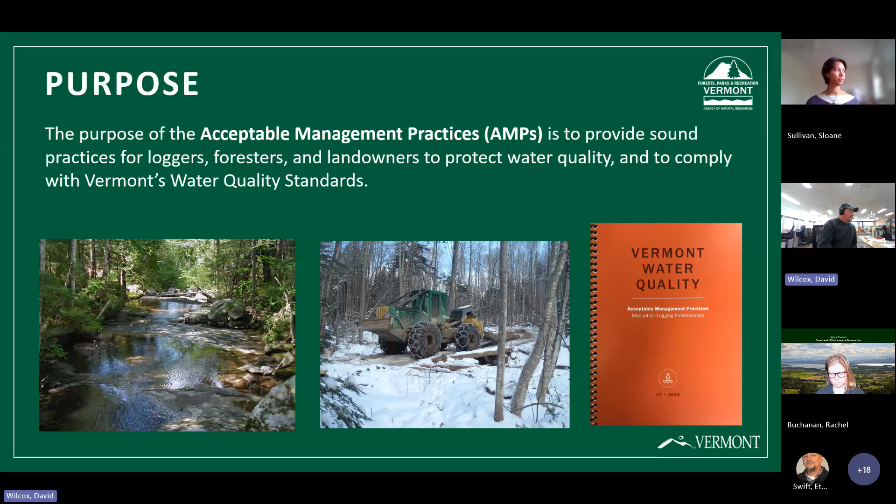AMP stands for Acceptable Management Practices. Hopefully they're not a new topic for folks, but they are to provide sound practices for loggers, foresters, and landowners to protect water quality and comply with Vermont's water quality standards. And to get started on the AMPs and what they are.

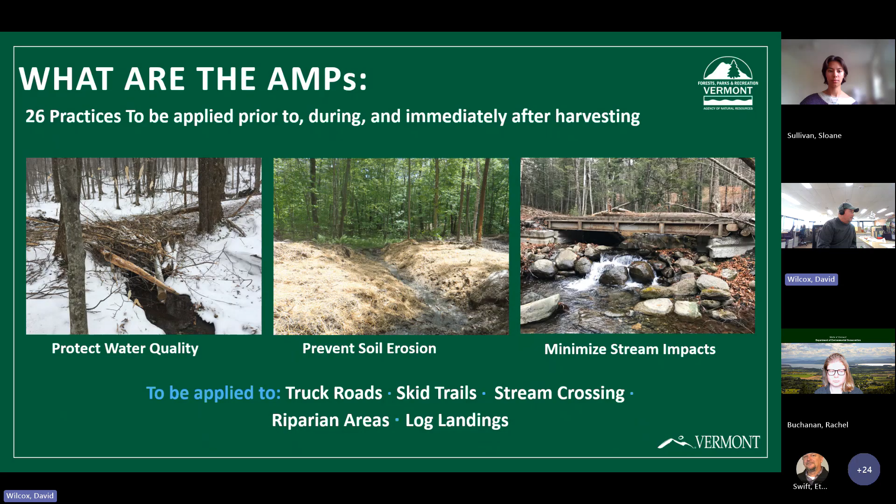Now I have a brief video I'd like to show, which is talking about the clean water commitment and the forest land practices, and hopefully it will go.

Nope. Sloane, any advice? Why won't that go? If it's helpful, you can either share your screen and open YouTube, or Rachel just sent the link and we can watch it asynchronously right now. So whichever you prefer, we can try those options. I think I will open it and we can look at it from there. Okay, great. Sorry about this. No worries. I swear it worked when... okay, there it is.

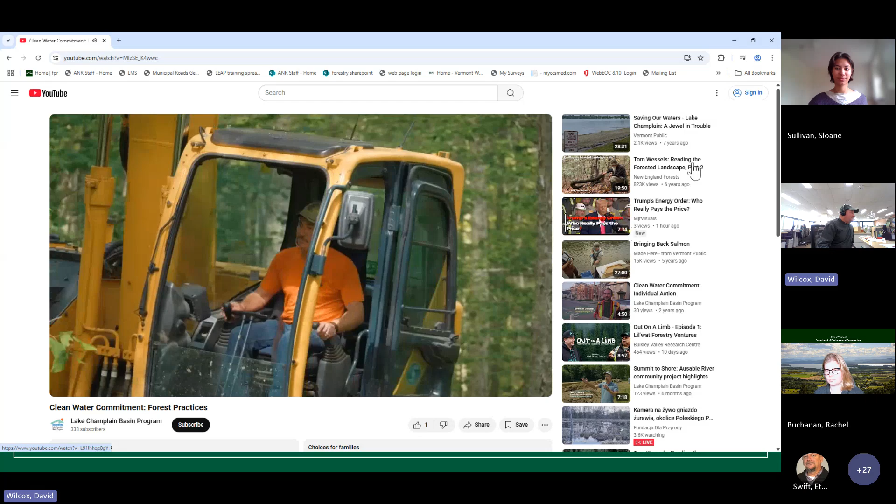Thumbs up. Great. I've been logging full time since 1987. Before that, I worked with my dad for a while, probably since I was like 9. Some guys get in it and they're in it for 3 years and they're done. They're on to doing something else, but I'm in this for a lifetime.

Roughly 73% of the Lake Champlain Basin's land area is forested. Much of this land is far from Lake Champlain and the human impact is relatively minor. But forests in Vermont contribute 15% of the phosphorus delivered to Lake Champlain. Broader use of management practices on private and state forest lands are helping to achieve the goals of the Lake Champlain Phosphorus TMDL. This area is within the Nebraska Valley Miller Brook watershed.

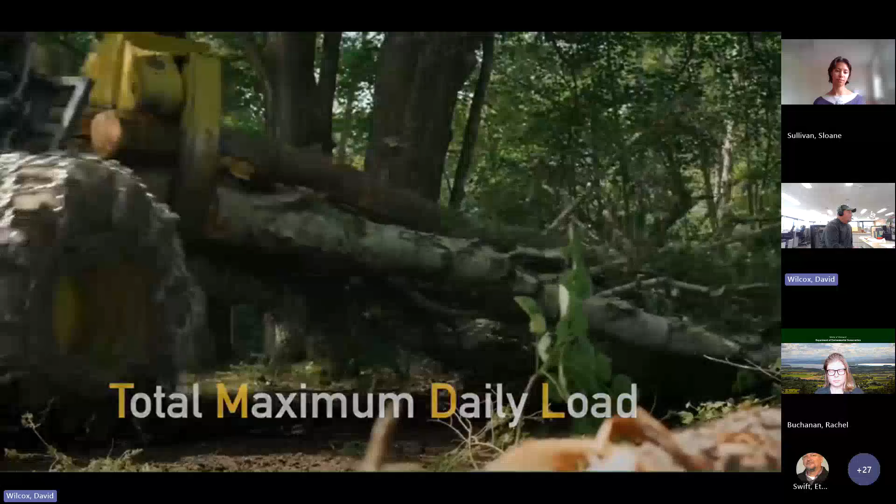It's a multi-use forest. It has lots of recreation, state parks, ski areas, hiking trails, but it's also a working forest where we harvest timber, firewood, all of the range of forest products that we get from our northern forests. We create trails, we create roads, we have stream crossings, and we need to do a good job of protecting the water quality in those areas. When we don't stabilize our trails and remove our crossings, that sediment can travel into headwater streams and eventually make its way to Lake Champlain. And that soil carries the phosphorus, which is the issue, and we want to prevent that.

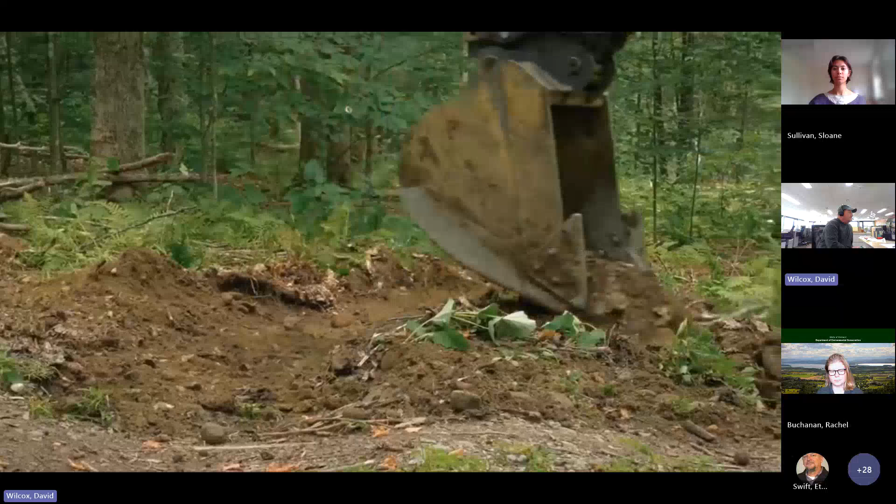Water bars are put in to control the erosion, like when it rains, like right now. And if you put them in correctly, there's less erosion. This is what we call closeout. It's the part of the sale after the harvesting is done.

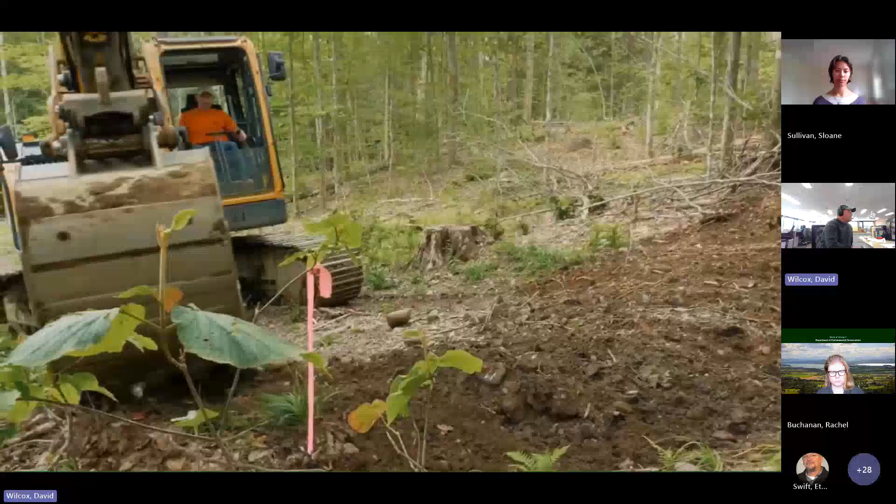So this flag tells the excavator operator that we need a water bar right here, which will divert the water that's coming down the trail, off the trail, into undisturbed soil, so it will soak in and it won't have enough speed or velocity to have any erosion.

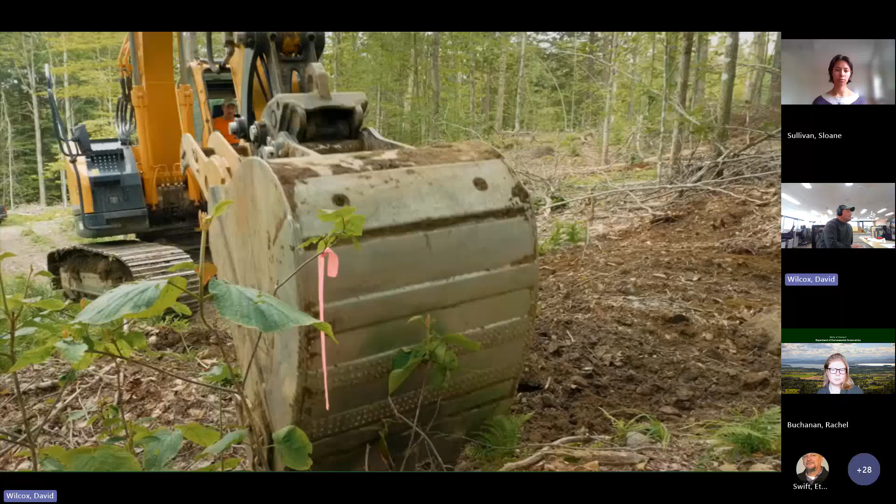Regulations that the state has on water quality have changed the law. They make sense. Regulations make sense. They rewrote the handbook for the water quality, the AMP handbook. The AMPs were Vermont's answer to the federal government for how the state was going to maintain water quality on logging jobs.

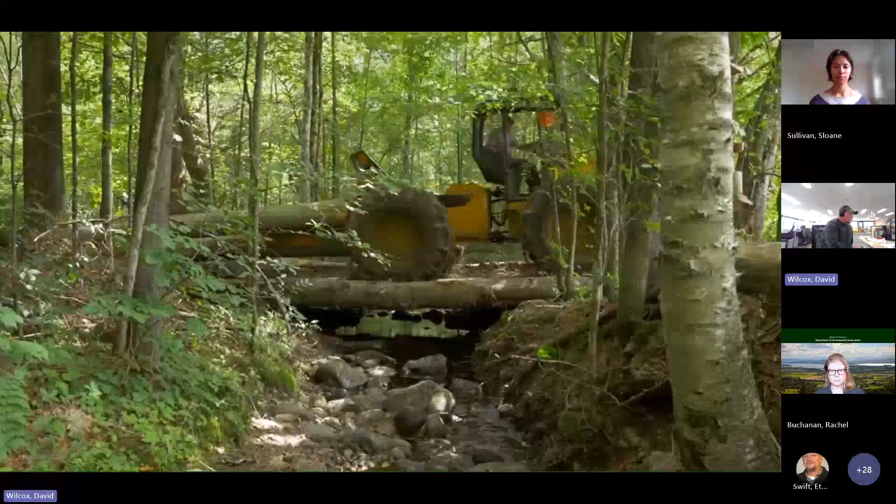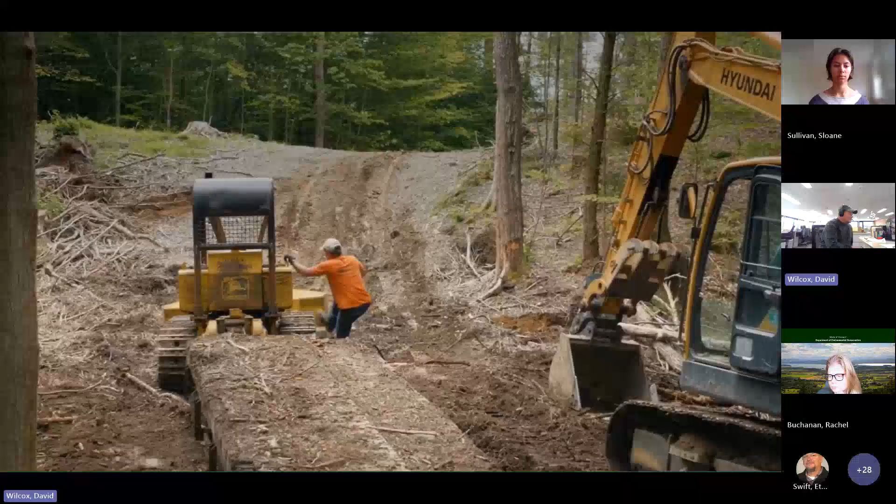We set up 5 skidder bridges on this job. 3 were in and maintained at all times, and the other 2 bridges were temporary bridges. We moved from brook crossing to brook crossing, and these are very, very small brooks. But if you don't impact the brooks, it keeps the water clean all the time. Use those portable skidder bridges from the state, and they work excellent.

Cordage wise, it's at least 2,500 cord that come across this big bridge right here. 2,500 cords. I'd say 1,500 trips across that bridge with a 43,000 pound machine. So bridges do work, and as you can see, there's hardly any impact on the brook. Obviously, you want to try to keep the water as clean as you can.

Makes it harder. You just got to work Saturdays and sometimes even a Sunday and just fill in wherever you can and keep your guys going at the same time. I mean, it just takes more time, that's all. But it's worth it in the end, you know.

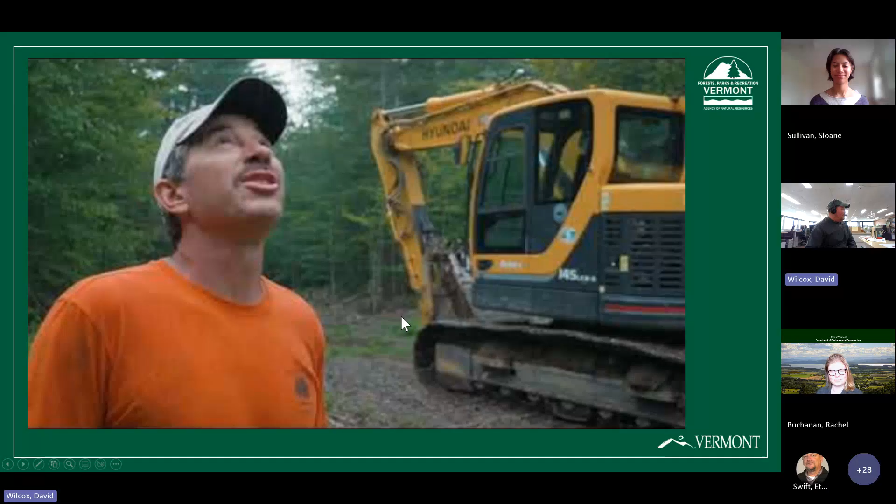All right, I'm assuming I'm still here. So, what is going on?

Sorry, that video was about the forest land sector and our commitment to protecting clean water, and how we do that on forest land during active logging. And I talked about it a little bit in the video, but does our infrastructure impact water quality? Our work in the woods creates compaction. We build roads and trails, which can redirect water flow, concentrate water flow, can increase soil erosion, and alter hydrology of a site if the AMPs aren't applied to kind of spread that water back out.

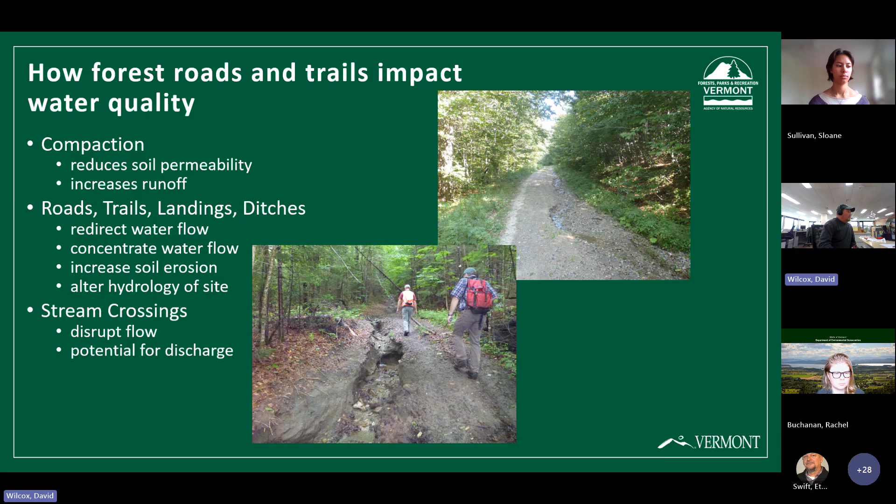And we also have stream crossings and opportunities to disrupt the flow and have potential for discharges into those streams as we work across and around those streams. So the basic principles of water resource protection that we have in the AMPs can be summed up pretty easily with these principles.

Basically maintain natural stream flow, have properly sized stream crossings, harden and stabilize approaches, and reduce the number of stream crossings through planning. That's one thing that we really focus on in our logger education programs with loggers and foresters, is to plan ahead and don't have any more crossings than you need, and try to have good layout, and don't create any issues that are unnecessary because you didn't plan ahead. And that goes to all of these things that we're talking about with logging layout and procedures.

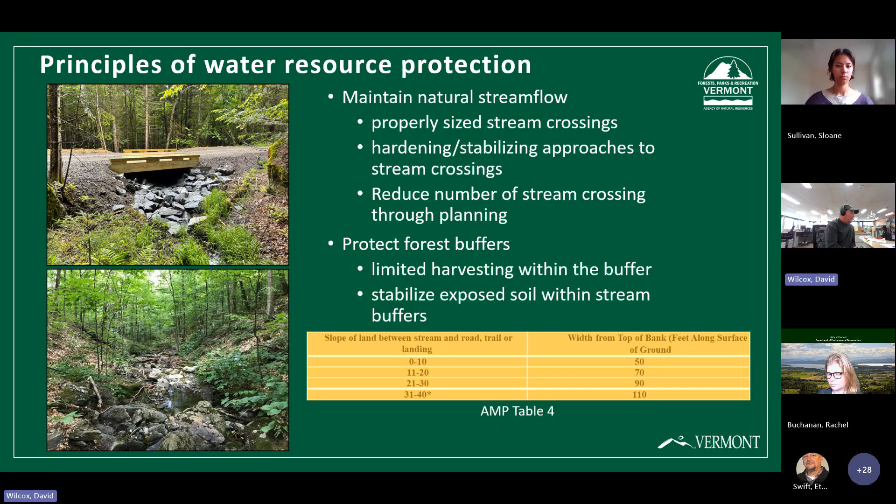So the next principle is our forest buffers, protecting our forest buffers, limiting harvesting within the buffer, and stabilizing any exposed soil within the stream buffer so that it doesn't create a discharge. In the AMPs manual, there's tables for various things. One of the tables is for buffer distance. So you look at the slope along the stream, and that will help you to calculate the buffer, and as the land next to the stream gets steeper, that buffer needs to be wider. And these distances are on each side of the stream. So on a 0 to 10% slope, the total buffer width is 100 feet for both sides of the stream.

And then to mitigate compaction, we utilize brush and corduroy on sensitive soils. And again, with planning, we try to avoid those sensitive sites like wetlands and seeps, where machinery is going to sink in and damage the soil or cause rutting. We try to stay out of those sites if we can't protect them with brush or corduroy. And again, planning is key with laying out our skid trails so we can avoid those areas.

And then probably the biggest and overall general principle of the AMPs is to spread water back out. If we're collecting it in our roads and trails, we want to spread it back out as fast as we can through the use of water bars, broad-based dips, and ditch relief culverts if we have a permanent truck road with ditches.

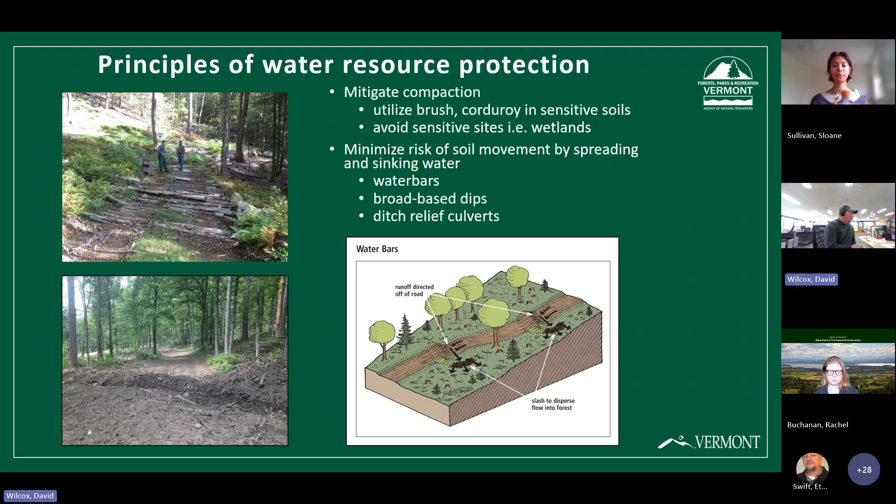And you can see on this slide some pictures of a water bar. Simple structure. It just keeps the water from running straight down the fall line of the road, whether it's wheel tracks or depression. A water bar cuts that off and puts the water back into the undisturbed soil.

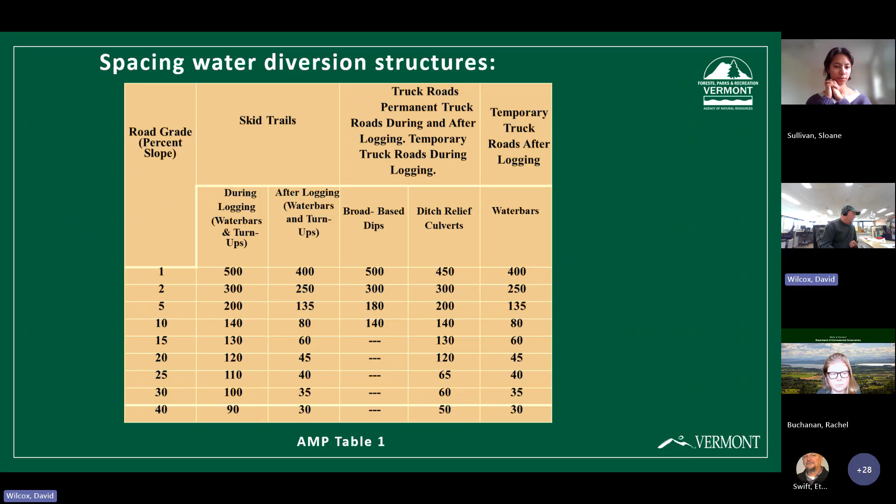Probably one of the most used tables in the AMPs is table 1, which is the spacing of water diversion structures. The percent slope is on the left, and then for whatever category road or trail you're on, whether it's during or after logging, those are the distances between those diversion structures. Yeah, that's a very key part of the AMPs.

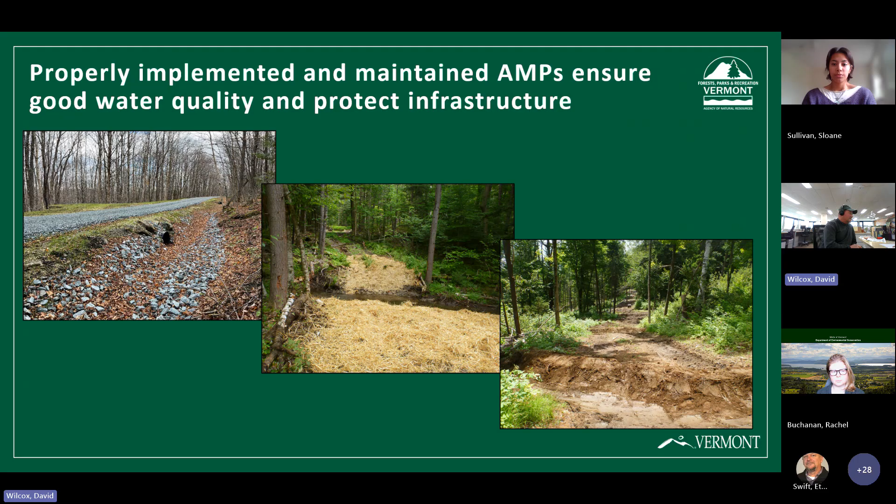And in general, properly implemented and maintained AMPs ensure good water quality, and also protect infrastructure, which is a valuable part of forest land. For folks who are managing their forest as a working forest, they need access to do that, and they don't want to have to put a road back together that gets washed out. So this is very important for protecting that infrastructure, as well as keeping the sediment out of the streams.

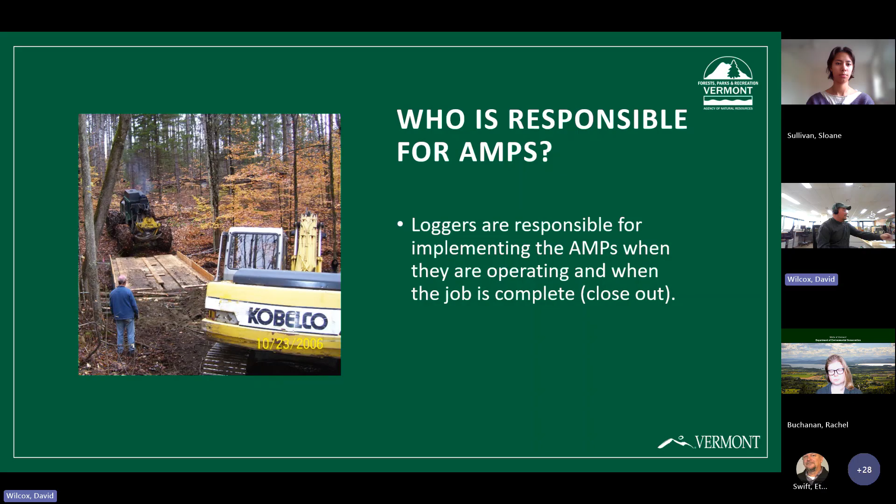And in terms of responsibility for the AMPs, loggers are responsible when they're doing the work, when they're operating the job, and when the job is completed. The closeout procedures are very important. And that's basically to set the job up for the next period of time where there's nobody in the woods harvesting. It could be 15 years before harvesting, and we want that to be stable.

So in Vermont, this slide covers the technical rules and so on. You need a permit to have a discharge into state waters. And the AMPs, when implemented properly, relieve a person from the obligation of obtaining a permit for discharges associated with logging operations. So that means if you're logging and you're implementing the AMPs properly, the minimal discharges that occur are acceptable to the state and to the federal government based on the authority of the AMPs.

And in addition to while the loggers are doing the active harvesting, proper closeout of a timber sale is important to stabilize the site and to achieve the presumption of compliance. So it's not just when they're there; it's immediately after they're gone, and that's what we work with our loggers on in education and training: what are the good closeout procedures, how far do you put seed and mulch, how far apart are your water bars, and where does the last one go before the stream crossing and so on.

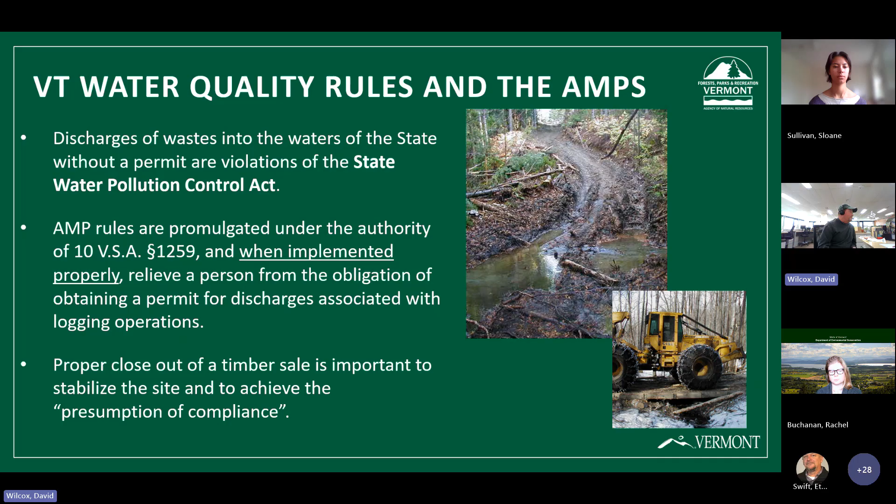Now, the long-term implementation and maintenance of clean water practices are oftentimes not associated with harvesting. And as I said, logging occurs occasionally every 15 to 20 years, sometimes even more than that. And those AMPs, those water bars and so on, need to be maintained so that those trails and roads don't get eroded.

And even if you have a good closeout practice, there are things that can limit the effectiveness of those practices. On highly erodible soils and very steep slopes, things don't last as long as they do on better soils and lower slopes. Recreational use of roads and trails can reduce the effectiveness of a water bar or stream crossing. And storm events, obviously, we've all seen impacts from storms over the last few years that can reduce the effectiveness of those AMPs.

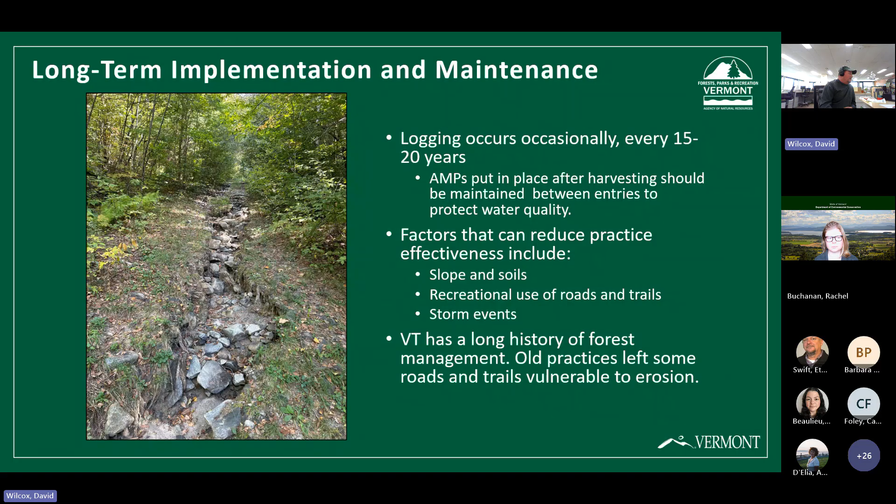And in addition, Vermont has had a long history of forest management, and some of the old practices that we used to do left some trails and roads vulnerable to erosion. And so those kind of legacy issues are out there, and we want to try to do what we can to bring those up to the standards of the AMPs.

So I'm going to talk about the Clean Water Initiative Program and the forestland practices, where we're assisting folks in implementing these clean water practices in the forestland sector for non-regulatory practices. So this means that active timber harvests on the landscape are not eligible for these practices, and active harvesting is defined as any time within 3 years after the closeout of a site. So that's what we're considering as the non-regulatory practices.

And we utilize the Forest Road and Trail Inventory, which is a new Survey123 tool to assess road and trail segments. And it was modeled after something that we developed on agency lands. And I actually did a presentation a few years ago on the ANR lands road erosion inventory.

We essentially adopted that so that it has a few different features, so we can do it on land where we don't have all of our roads mapped, and with a little bit different road types than we have on our state forests and state parks and wildlife management areas. But it also does include the same or similar prioritization table for segment scoring, as well as phosphorus accounting, when those segments are improved and brought up to AMP standards.

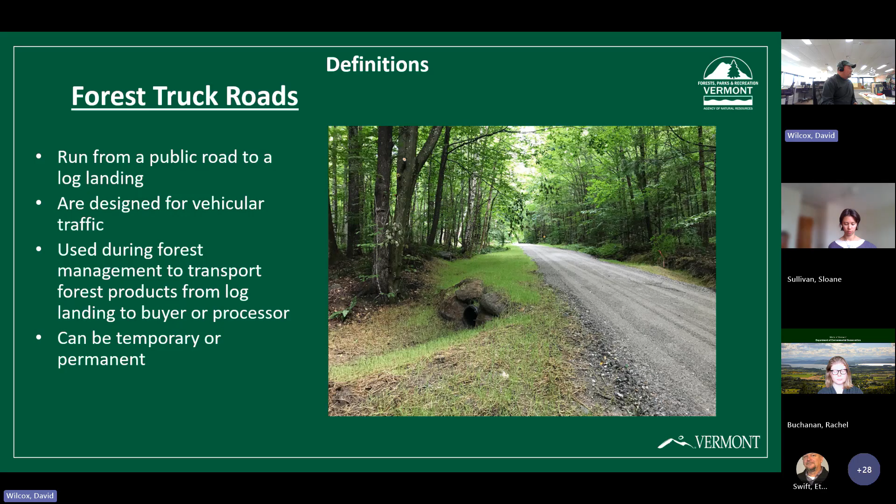And some of them are quite good roads. You know, they're crowned and graded, and you can drive on them with a regular passenger car. Some of them are not that smooth and flat, and they have water bars in them, at which point you're not going to get on them with a car, but they can be very, very good roads. And they're essentially transporting forest products from a log landing to the buyer or processor, and they can be temporary or permanent. The permanent truck roads are open most of the year, say call them 3-season roads.

We try to stay off our roads in mud season, because we can hardly get on many of our town roads in mud season. And they generally don't have the base and material that will support driving on in the wettest time of the year. But the 3 seasons, other than mud season, they're almost like a town road. Not as wide, but certainly crowned, ditched, cross drain culverts, permanent stream crossings, base material, often gravel. They're good roads.

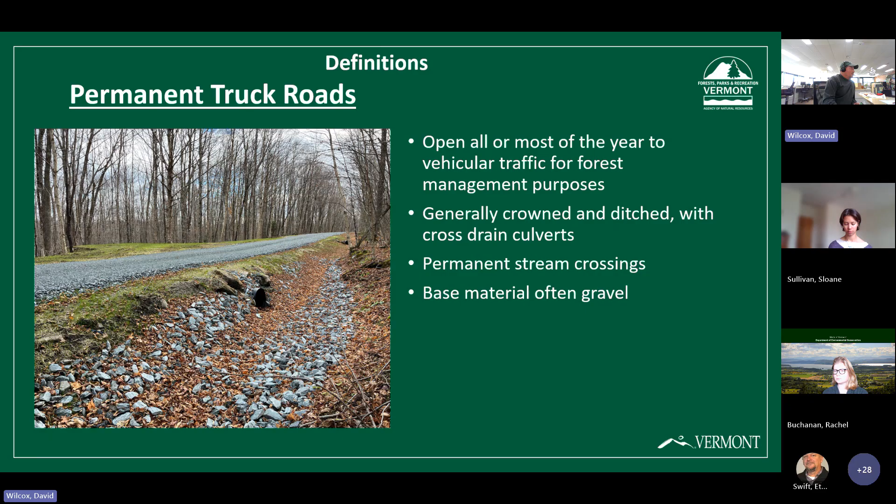Our temporary truck roads are built to the same specification in terms of width, and turning and corners and that sort of thing, but they're for short-term use, seasonal use, usually winter season, or very dry summer season. They're generally built out of native material. They don't have gravel. They have surface drainage structures, generally not ditched and with culverts. And in many cases, stream crossings are pulled following the harvesting. So they're not left in permanently like a permanent truck road.

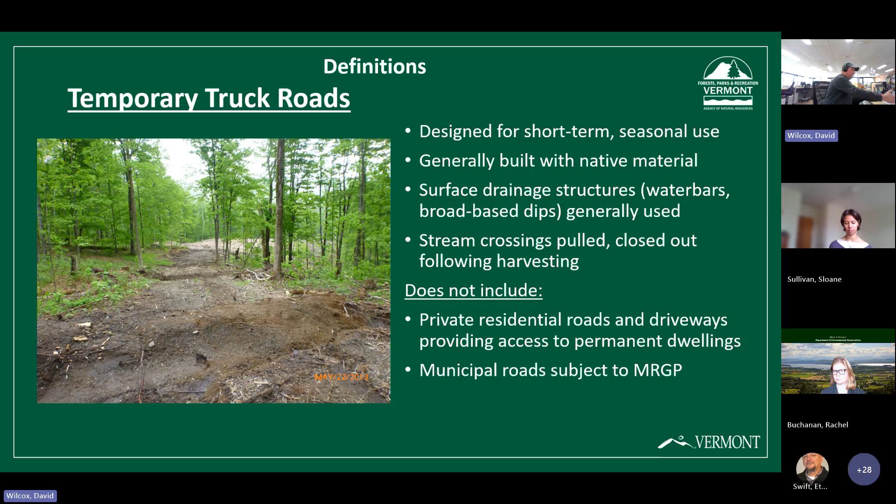And our roads, either temporary or permanent, do not include private residential roads and driveways providing access to permanent dwellings, or municipal roads subject to the MRGP, like class 4 town roads. So if you have a driveway to your house, and then beyond your house you have a landing, the portion of that road from the town road to your house would not be considered a forest truck road, but the portion beyond that from the end of your driveway to your landing would be considered a forest truck road.

And then our third category is skid trails. And the definition of a skid trail is from the log landing to the stump, or they're designed for logging equipment: skidders, forwarders, feller bunchers, bulldozers, all those kind of off-road vehicles. So they're not designed for vehicular traffic. Very few skid trails you can drive a passenger car or truck on. They're almost always built with native material, and have water bars to divert surface flow.

And generally we use temporary stream crossings on skid trails, and the department has in the past few years really prioritized our ability to promote temporary stream crossings by providing rental bridges and bridge cost share programs, so that there are many more temporary bridges out on the landscape now than there used to be, and contractors are getting very well accustomed to using and relying on those temporary bridges.

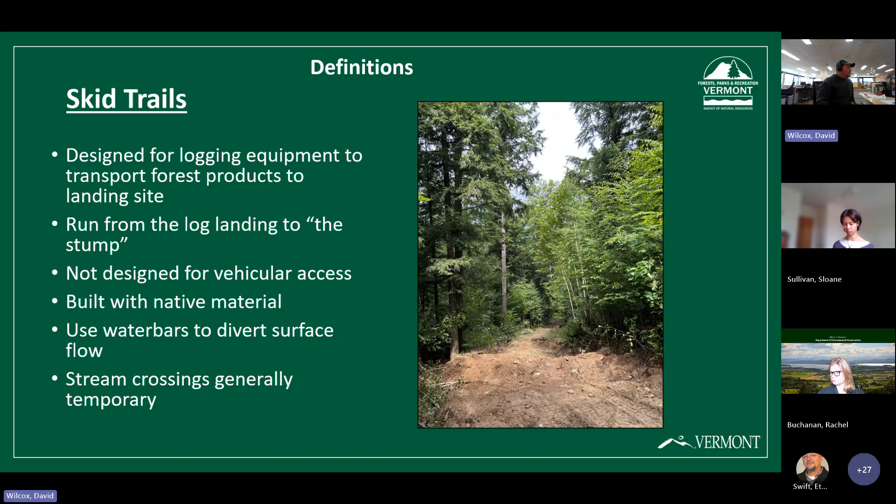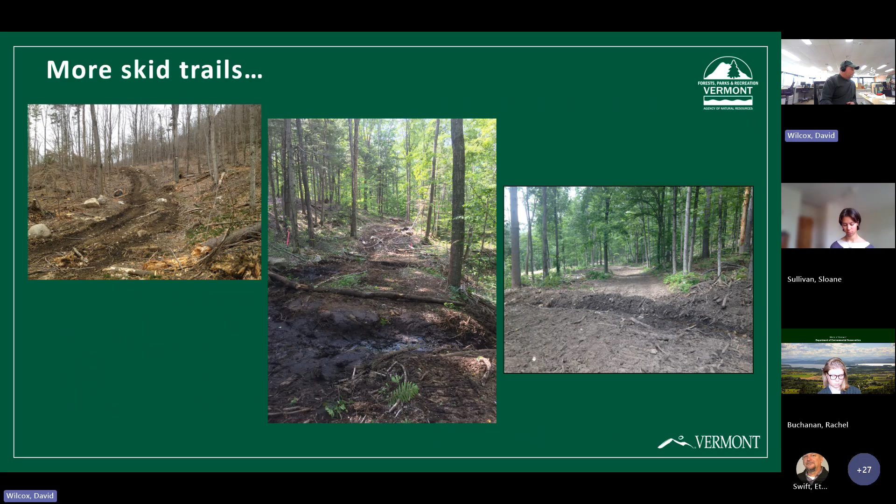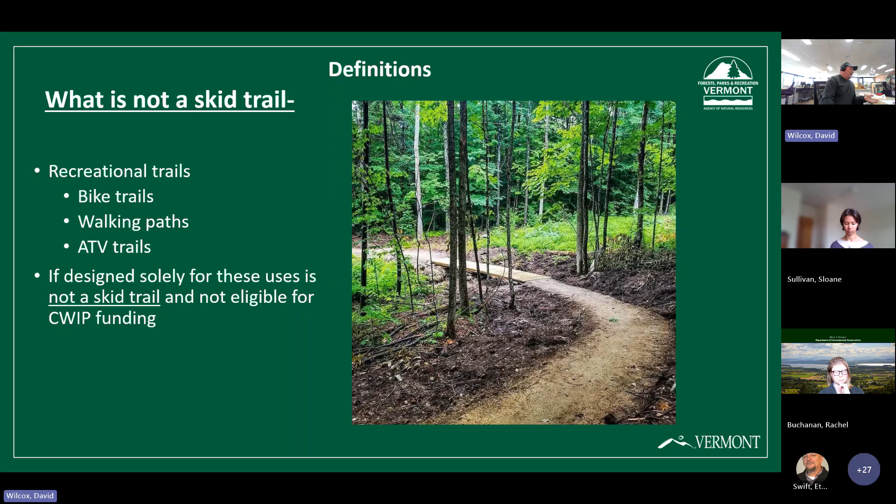And I wanted to have a slide of what isn't a skid trail and where not to use that road erosion inventory, or trail erosion inventory. So obviously this is a single track mountain bike trail or hiking trail, not designed for forest operations. It's a recreational trail designed solely for that use. So it is not a skid trail. And these could be bike trails, walking paths, ATV trails. And these are not appropriate for the trail inventory program, Survey 123 app, or eligible for CWIP funding at this time.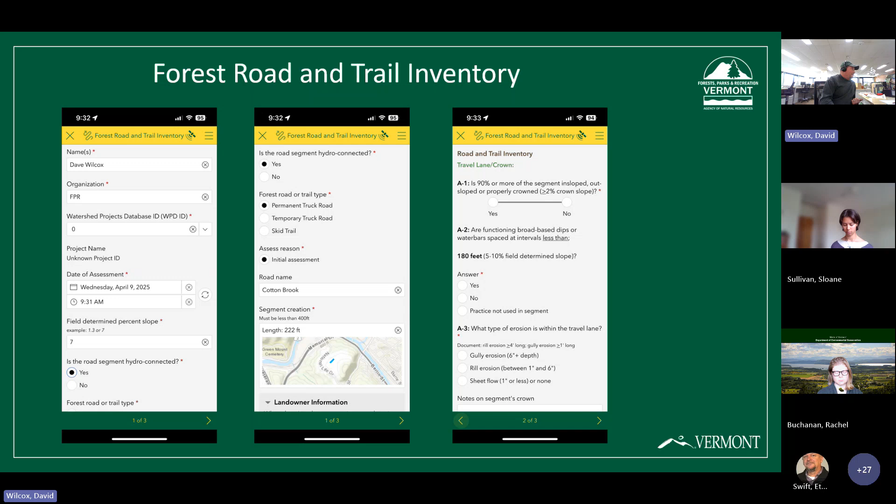And I don't know if you noticed, there's a checkbox for hydrologically connected. That is a key to this whole survey, is that we are looking for segments that are hydrologically connected. That's where we're concerned about erosion, because those segments are the ones that will deliver sediment to a stream. If it's not hydrologically connected, it has very little to no chance of delivering sediment to a stream.

So we're looking for those hydrologically connected segments, and what we mean by hydrologically connected is a segment that is within 100 feet of a water source, either next to it or adjacent to it, and that includes intermittent and perennial streams, wetlands, and open water, like ponds and lakes and so on, or it bisects one of those water resources, or if it is a segment that is uphill from and drains to a hydrologically connected segment.

So if you had a segment at the bottom of a hill on a road that crosses a stream, and that hill went for, say, 4 or 5 segments, and all of those segments were draining down to that stream crossing, all of those segments would be hydrologically connected, even though they're not within 100 feet of the stream. They drain to a segment that is within 100 feet of the stream. And if those practices failed, if those water bars or ditch relief culverts failed, that sediment would continue directly into the stream and cause a discharge.

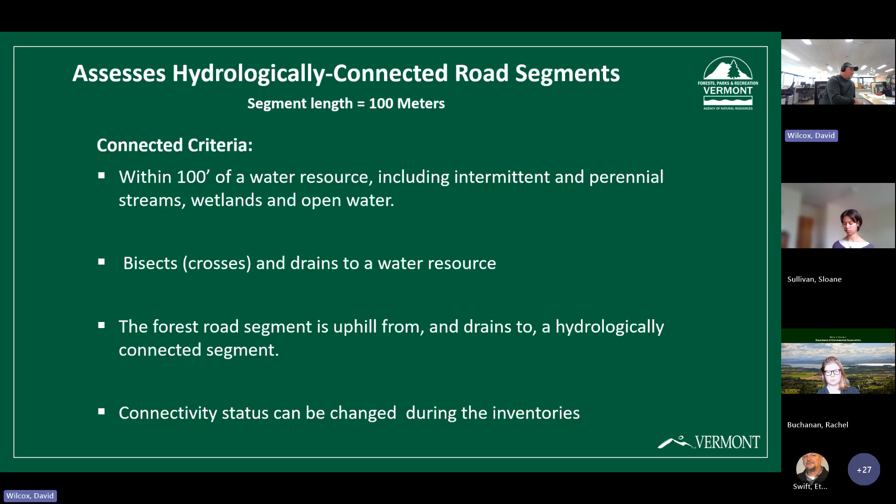So once you get over that hill and the water flows a different direction, that is not hydrologically connected to that stream, then you would have to look farther down the road to see if there's another stream crossing that it could be connected to. Using mapping and remote sensing to determine how many streams are on the landscape is difficult, because we have good mapping, but we don't have all of our intermittent streams mapped. So it takes some walking around to figure out where the hydrologically connected segments are.

So when we collect the data for a hydrologically connected segment, we look at 5 different parts of that segment, and each segment is roughly 100 meters long, 328 feet, and we do that so we can break the road or trail up into bite-sized chunks, and 100 meters seemed to be a good distance. It mirrors what they do with the MRGP on municipal town roads, and it's a big enough segment to be efficient, but it's small enough that you can pick up on all the nuances of that segment.

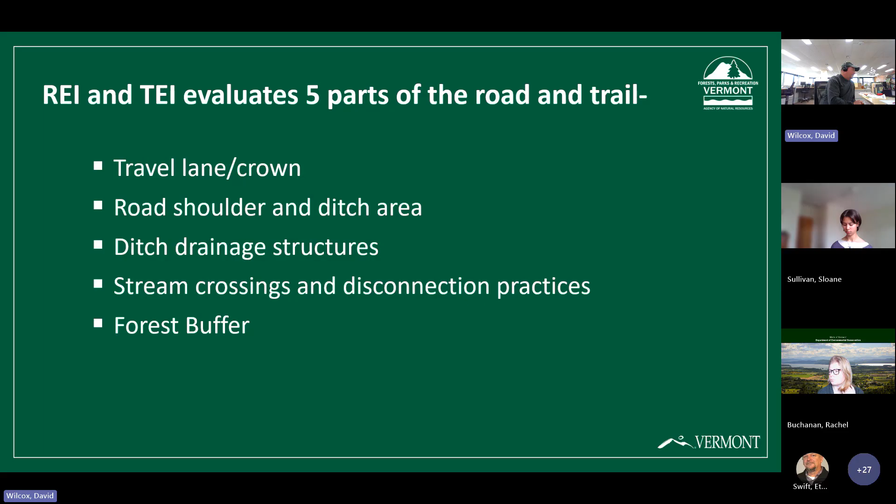The scoring of the REI, you have three options: fully meets, partially meets, or does not meet. And that's an output of the Survey 123 app, obviously. And then we have a prioritization table, which helps us determine the priority of those segments that are at different slopes. Slope is really a key to the erosion risk. And in addition to slope, stream crossings are also an increased risk. So any segment with failing or undersized stream crossings is considered high priority, because a lot of times stream crossings are on low slope segments. So if we didn't have this little caveat, we would be missing the priority of those stream crossings.

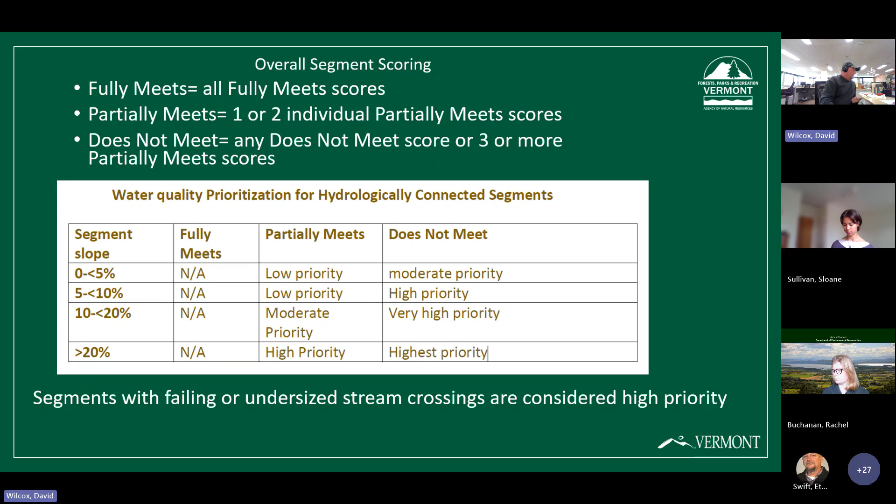So that's where we see most of our issues, or a lot of the issues are with stream crossings. And then I wanted to go through some. We've been using the road erosion inventory on agency lands for several years now. We've been using it to identify work that's necessary to bring these segments up to the AMP standards. I've got a few slides of some examples of improvement practices on forest truck roads. We haven't gotten to forest trails, skid trails on our agency land.

We work with loggers. We have foresters working in the woods on our active timber sales, and we do exemplary work on agency lands as far as the AMPs, and we have a lot of forest roads that were built many years ago, when the standards weren't such as they are now, and we're working just like any forest landowner to bring those roads up to the AMP standards. So most of these photos are on agency land, and it gives you a good sense of what kind of work needs to be done in this road category, so to speak.

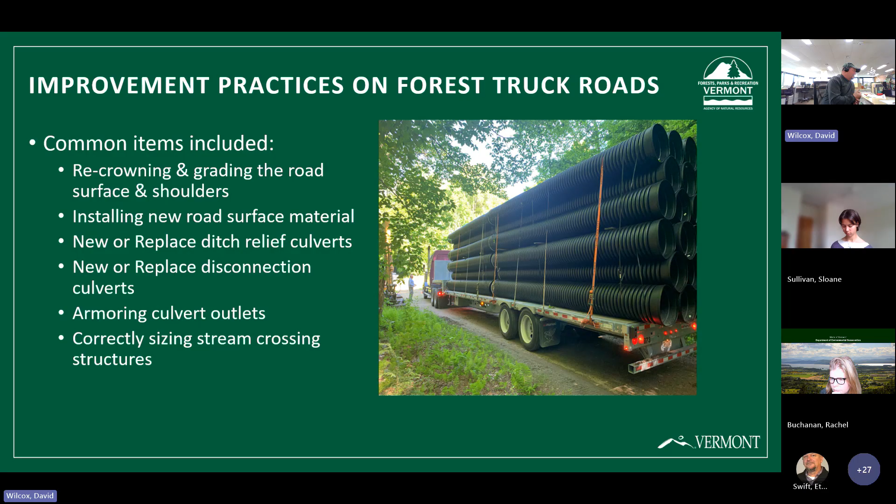And disconnection culverts, which is right before a stream crossing. You want to run that ditch water across the road, underneath the road, so that it doesn't discharge directly into the stream. And then armoring culvert outlets, and correctly sizing stream crossing structures are also on the list of things that we've been doing. Some examples of road surface and shoulder improvements.

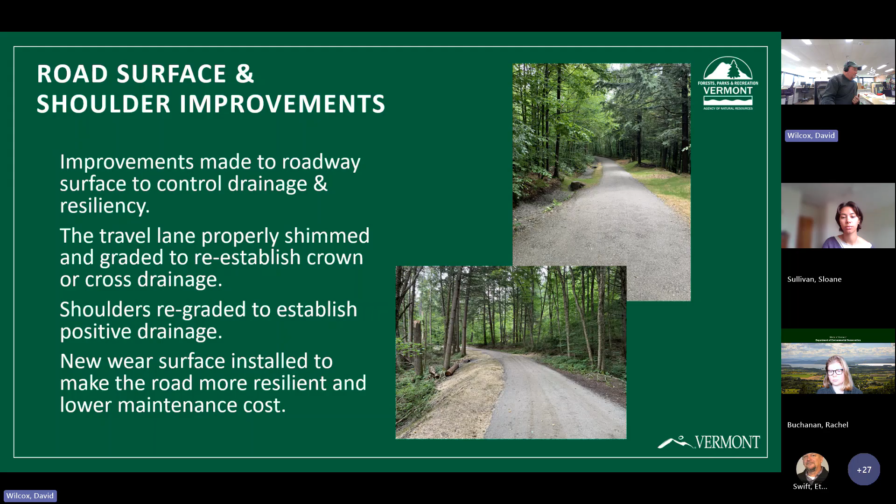That is good material that you can grade, and you can compact, and that will stay. And we've seen in the flood events in the last 2 years where our AMP work that we've done, like the examples you see here, held up beautifully in those storms. It almost looked like it didn't rain in a lot of these places where we've done this work. So it works, you know, the stabilization, the better material, the compaction makes a big difference.

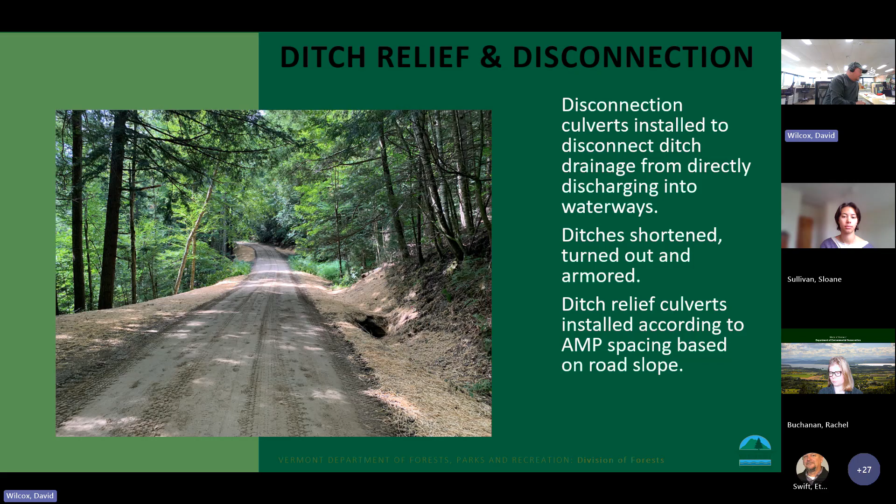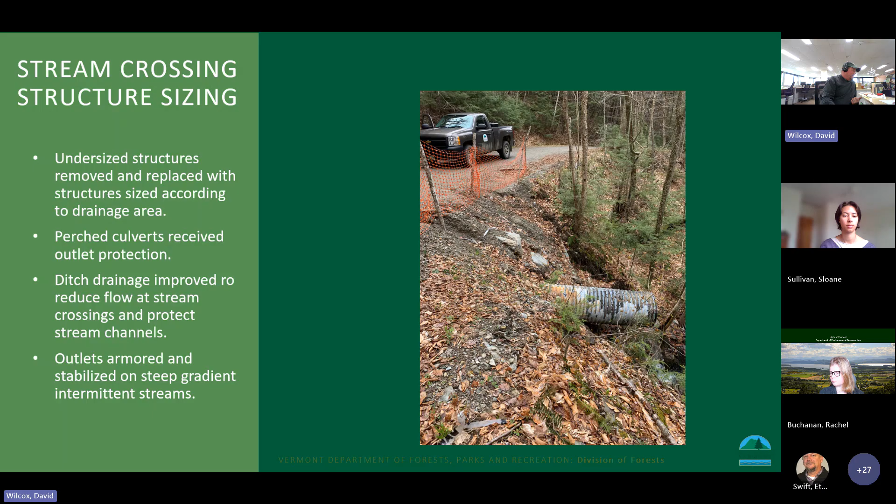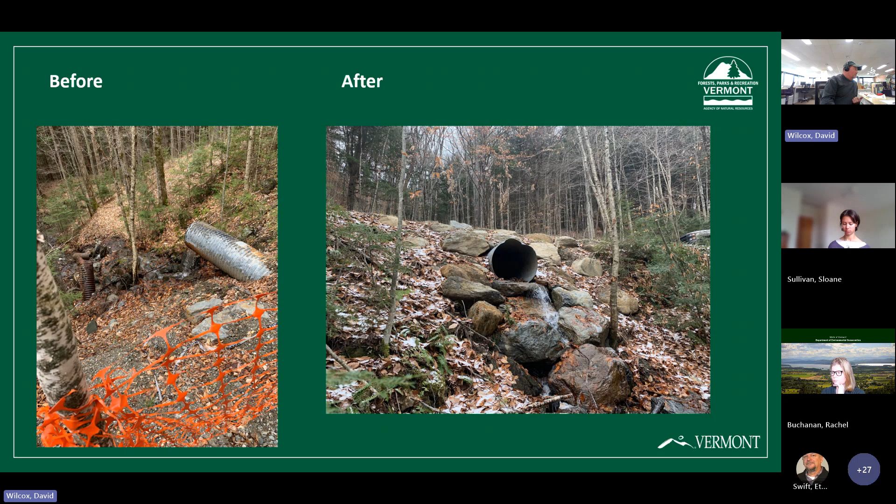So we have a properly sized culvert. It doesn't look much bigger, but it is a lot bigger, and we've stepped that water flow down the bank with rocks large enough to prevent erosion and get it down into the stream channel, or continue the stream channel down and be stable and not have almost continuous erosion. So I think that's my last slide of some examples.